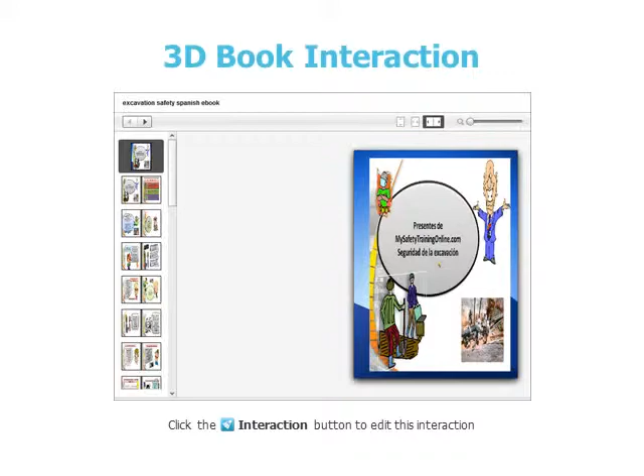What you will learn from excavation safety training: OSHA laws and regulations, excavation injury accident records, excavation safety definitions, the definition of soil classifications, discussion of protective systems, a discussion of sloping and its hazards and controls, and emergency response procedures.

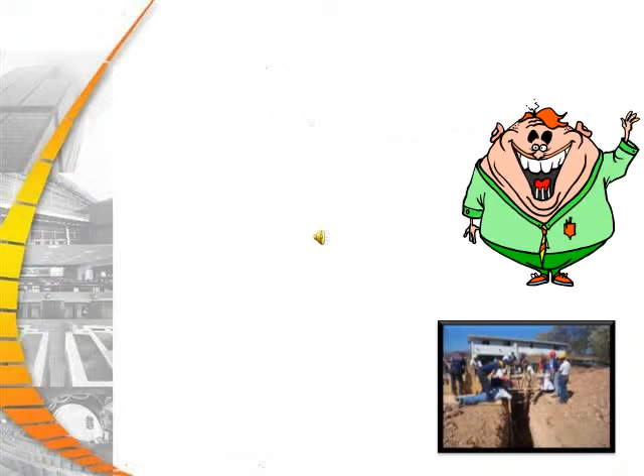29 CFR 1926, Subpart P covers excavation safety. It details that management must appoint a competent person. Soil evaluations must be done by a competent person, along with daily inspections, shoring and sloping evaluations, and most importantly, stop work authority by a competent person.

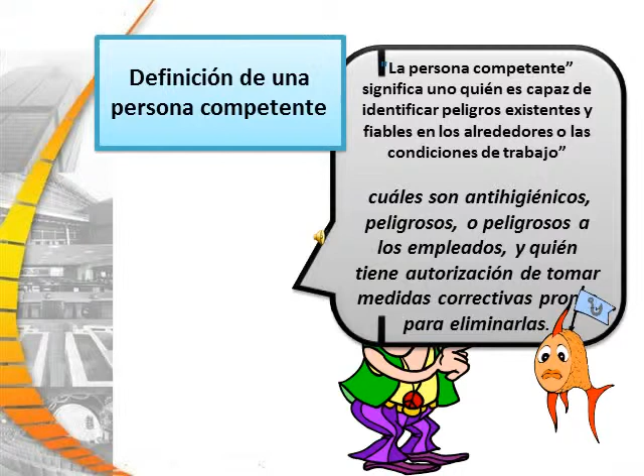Part 2, Excavation Safety Definitions. The definition of a competent person: one who is capable of identifying existing and predictable hazards in the surroundings or working conditions which are unsanitary, hazardous, or dangerous to employees, and who has the authorization to prompt corrective action to eliminate them.

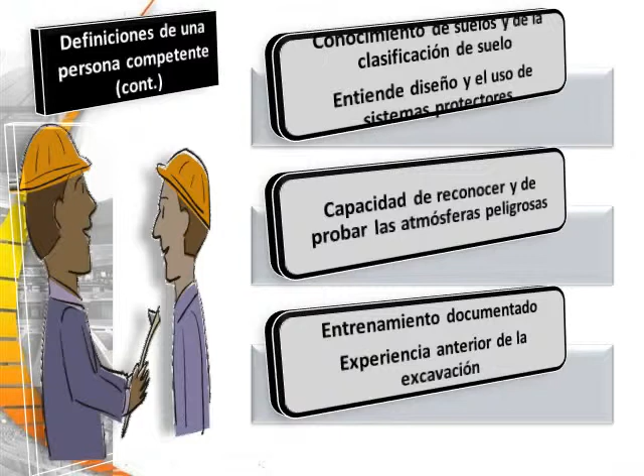Part 3 of a competent person definition. Site safety briefings on excavation safety must be given by the competent person. Daily excavation inspections should be done by the person, and more frequently if conditions change, such as a freeze, a thaw, rain, the introduction of vibration, or the site is physically located in such a situation that it needs more frequent inspections. Most importantly, the competent person must have stop work authority.

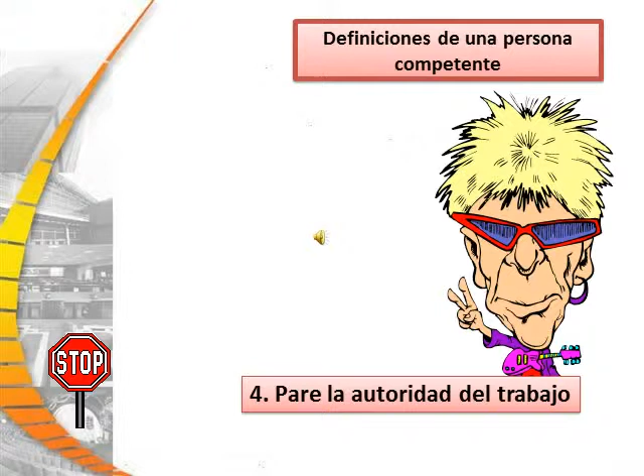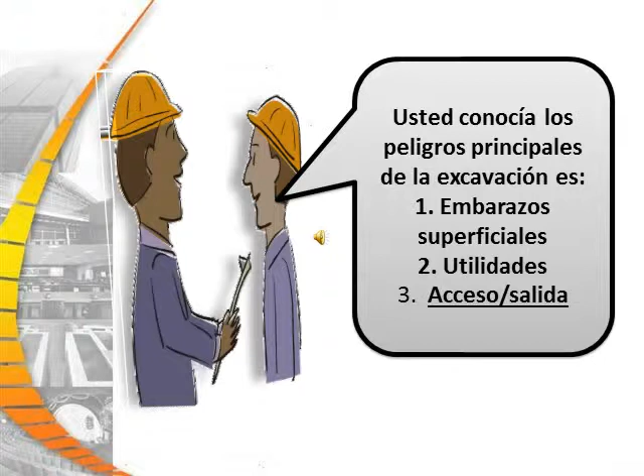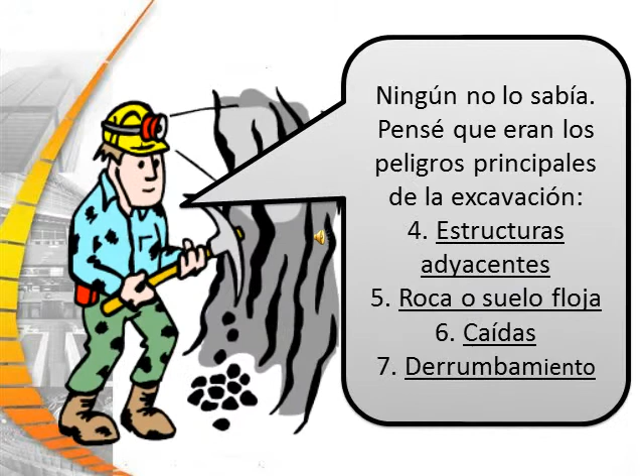Part 3, Excavation Hazards. The main excavation hazards start with surface encumbrances, which we will define, utilities, access and egress issues. These issues also include adjacent structures, loose rock or soil, falls, and cave-ins. Included in these are vehicle traffic, falling loads, mobile equipment, hazardous atmosphere, and water accumulation.

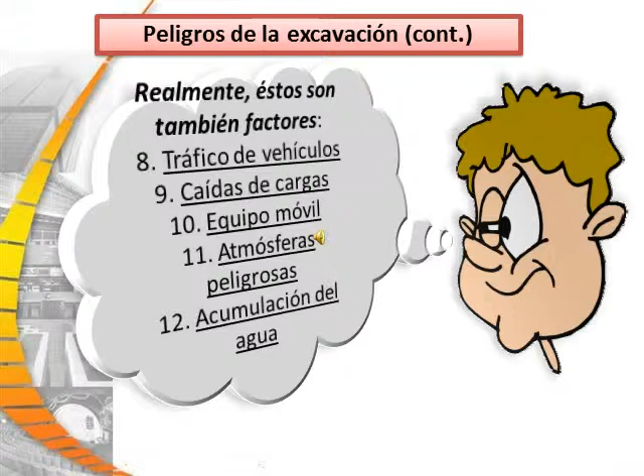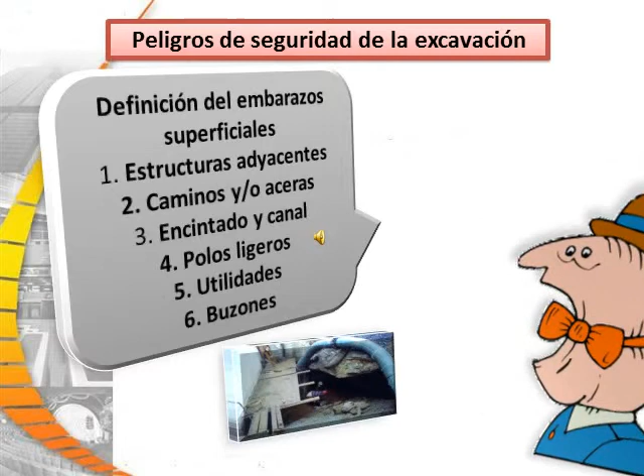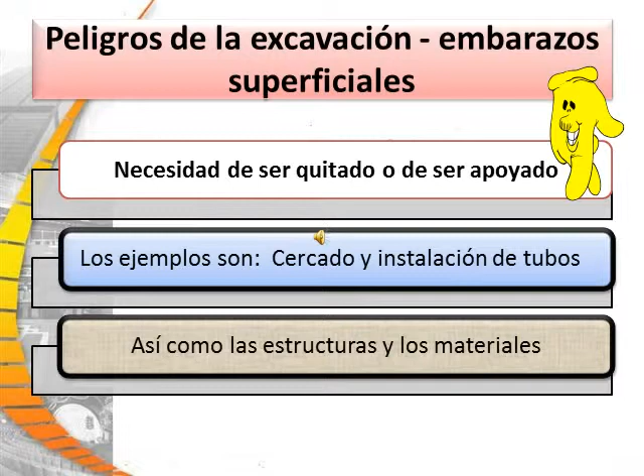Let's define what a surface encumbrance entails. This includes adjacent structures, roads and/or sidewalks, curbs and gutters, light poles, utilities, and mailboxes. Surface encumbrances need to be removed or supported, and examples of this would be fencing and piping, as well as any structures and materials nearby the excavation.

Included excavation hazards are utilities such as electrical, gas, oil, and steam, communication, cable TV, water, and sewer. Remember to locate these prior to digging, certify that they are deactivated, and protect, support, or remove them.

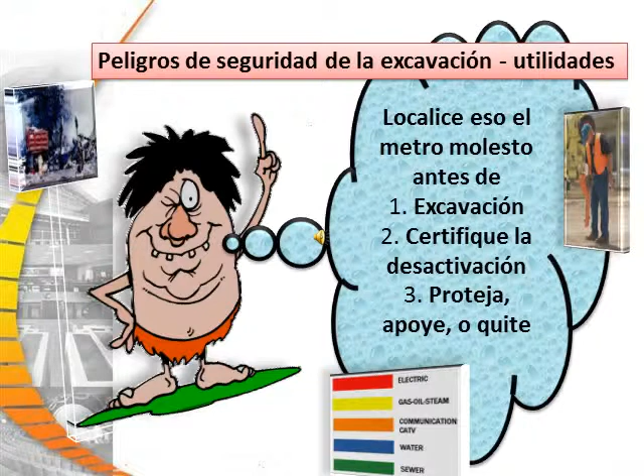The list of excavation safety hazards includes above-ground hazards, such as power lines, which need to be de-energized, relocated, or isolated.

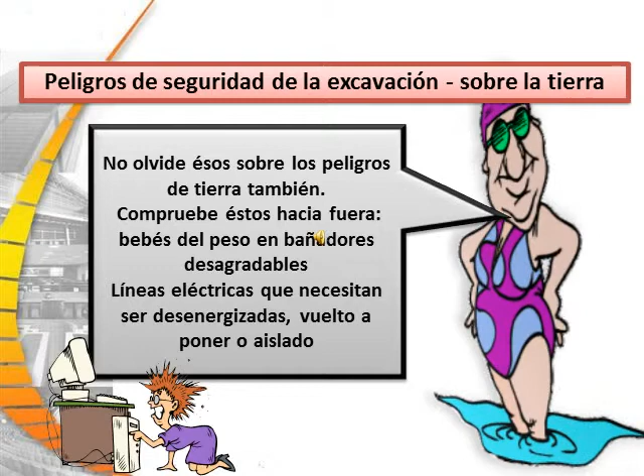Safety hazards include access-egress issues, such as poor housekeeping, which is the number one cause of slips, trips, and falls. Debris needs to be cleared from all work areas. Those hazards need to be marked, such as with barricades or covering the holes, and egress provided for the work crew inside the excavation.

Access and egress criteria mean a 25-foot travel distance from any point in the excavation. The employer is required to provide ladders, ramps, and stairs to allow the work crew to exit the excavation.

Traffic control is done by the competent person who sets up the site, first through evaluation of where the potential hazards are, and then devising methods of controlling those hazards. All personnel exposed to traffic safety issues need to be equipped with traffic safety vests.

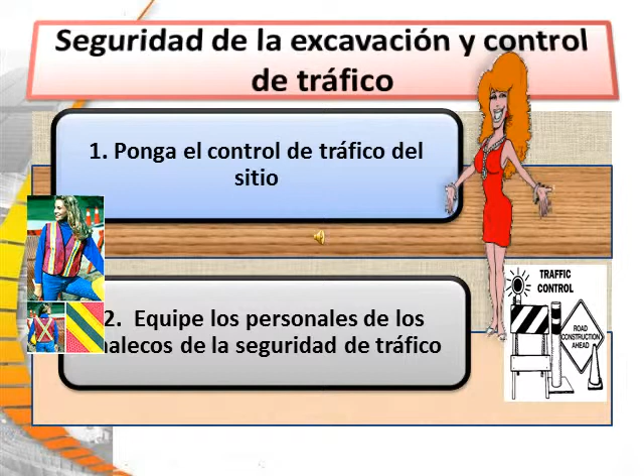Remember, there is no work under loads which are operational, and operators must remain in the cab of all cranes in above-ground work near excavation. A competent person supervising the site will determine when these hazards are controlled.

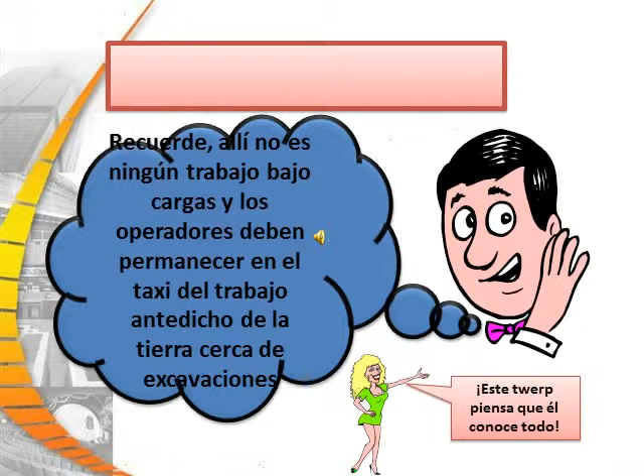Mobile equipment at an excavation site requires setting up a warning system using barricades, hand signals, mechanical signals, and stop logs, as well as grading away from the excavation. All this, of course, is done under the supervision of a competent person.

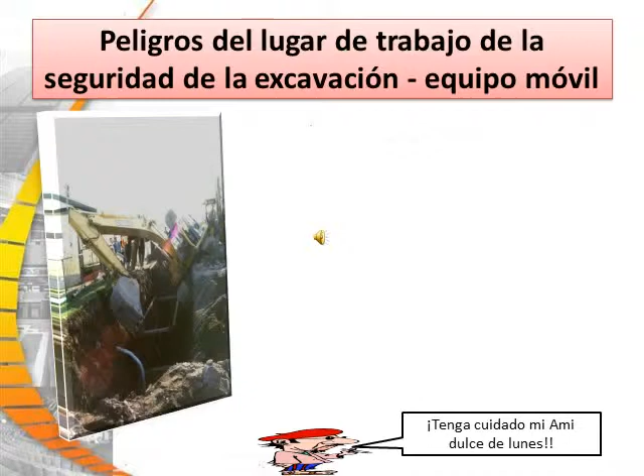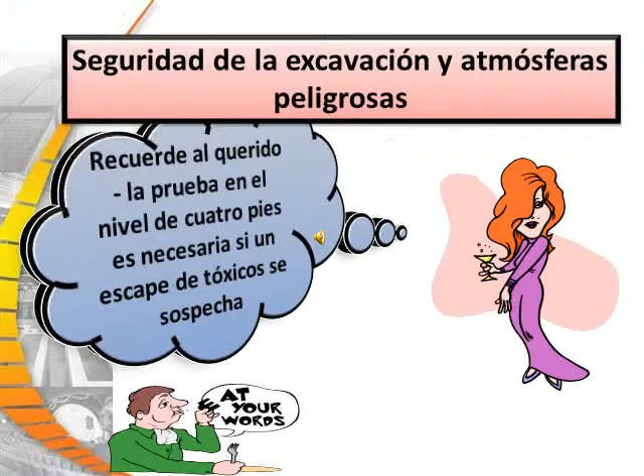Hazardous atmospheres present one of the most prevalent excavation safety hazards, and testing at the 4-foot level is necessary if a leak or toxic substance is suspected by any of the work crew. Testing for hazardous atmospheres includes using the lower explosive limit whenever low oxygen is suspected, and checking for the presence of carbon monoxide, hydrogen sulfide, petroleum products, or other toxics which could invade the atmosphere.

Excavation safety hazards, when controlling hazardous gases, mean displacing those hazardous gases and vapors with considerations for those that are heavier than air or lighter than air. This means exhausting or blowing in a volume of air needed to lower the concentrations to acceptable levels.

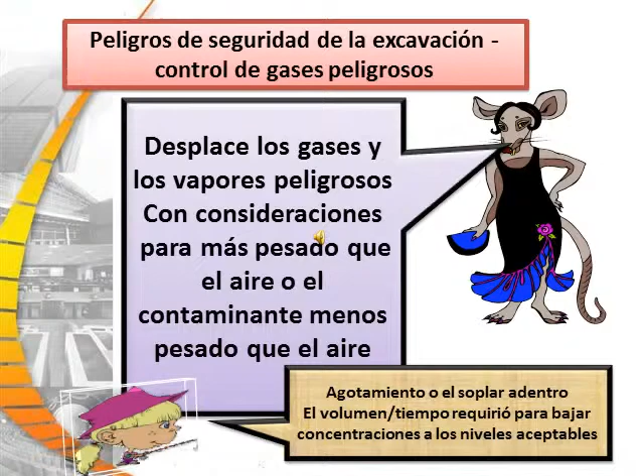Water hazards include protection from water accumulation, water removal using pumping devices, and runoff protection. The competent person should consider temporarily shutting off all water lines anywhere near the excavation site.

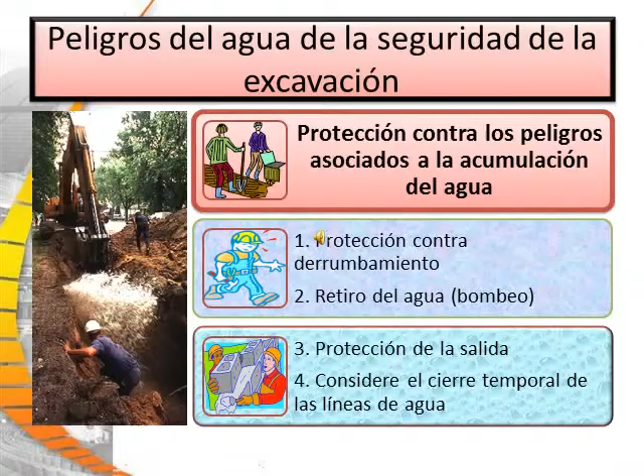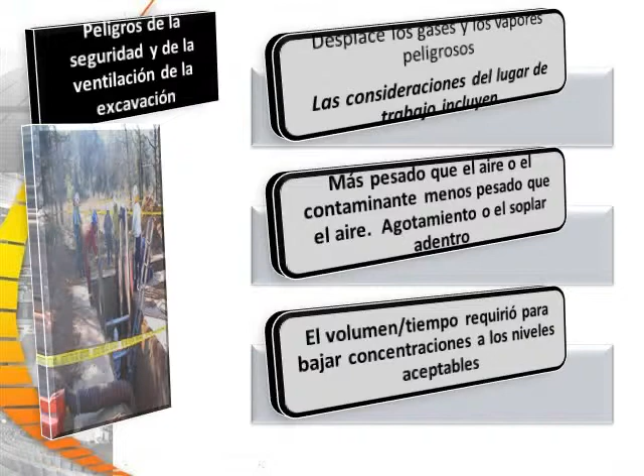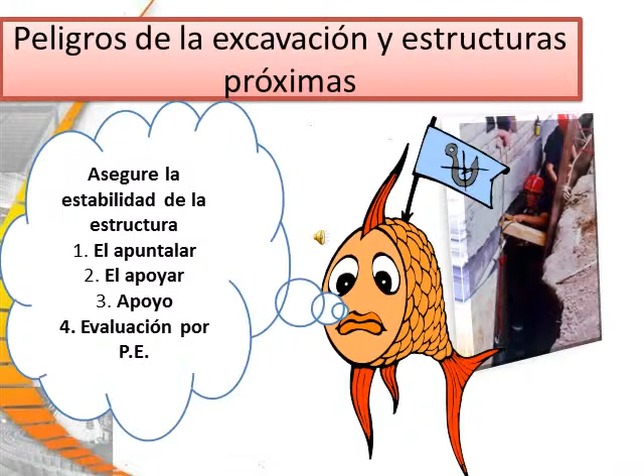Controlling excavation hazards includes shoring and bracing, underpinning, and evaluation by a professional engineer. Rock and soil excavation safety hazards mean the protection of employees from these hazards using scaling, protective barriers, and placing materials at least 2 feet from the edge, with no work on slopes above workers in an excavation.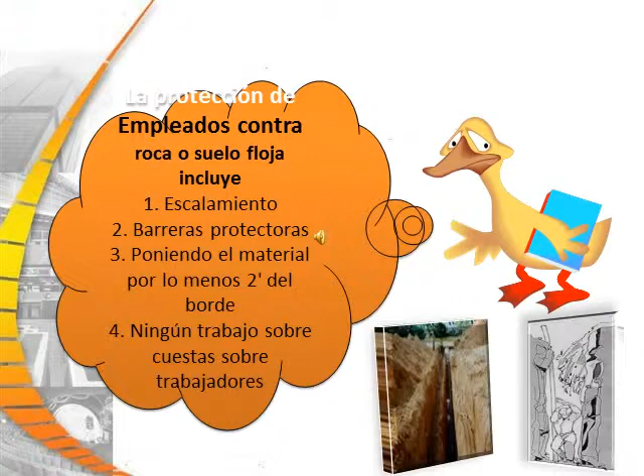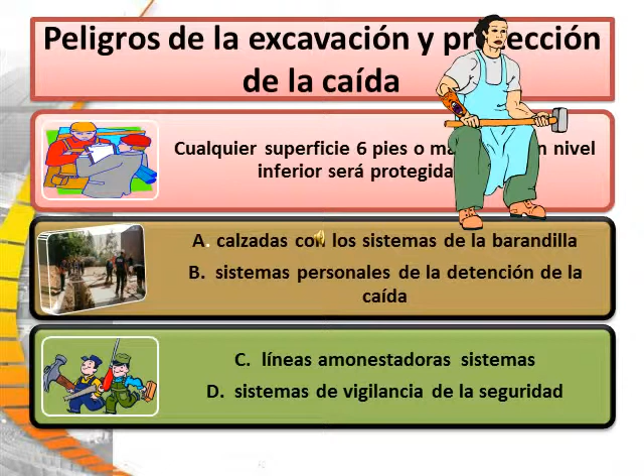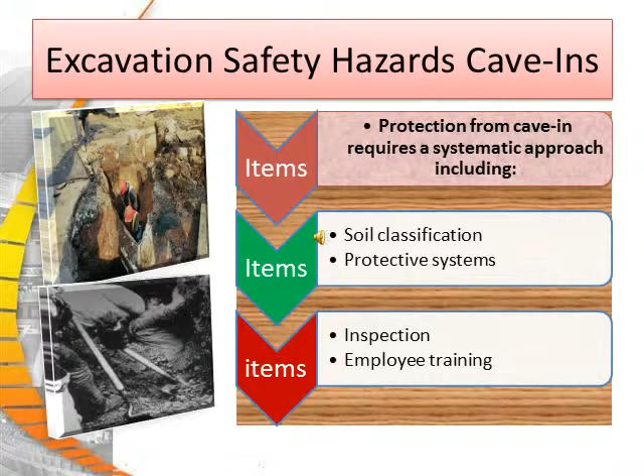Excavation safety hazards for cave-ins include protection from cave-ins requiring a systematic approach using soil classification, protective systems, constant inspections, and employee training. We'll discuss each of these in depth.

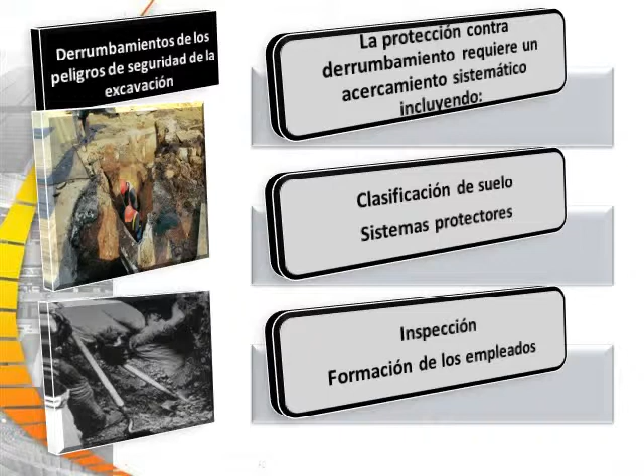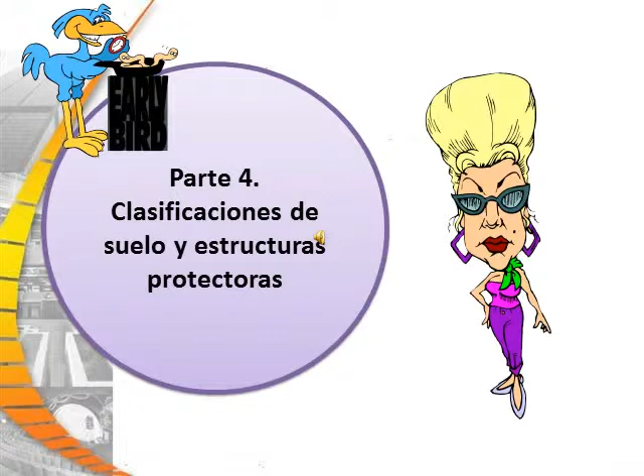Part 4, Soil Classifications and Protective Systems. Protective systems are required unless the excavation is in stable rock, the excavation is less than 5 feet, or 4 feet in some states, and examination by a competent person determines no potential for cave-ins.

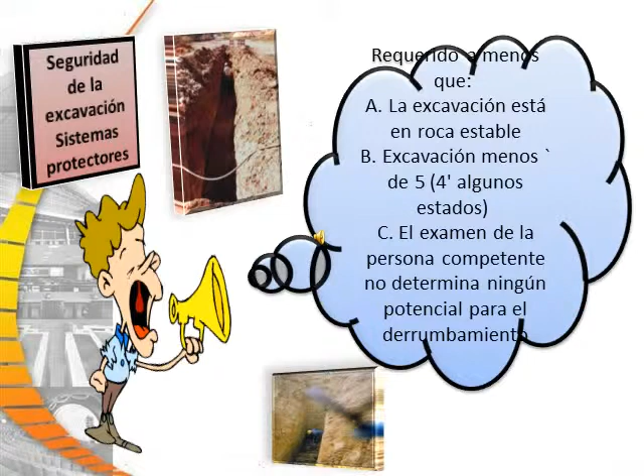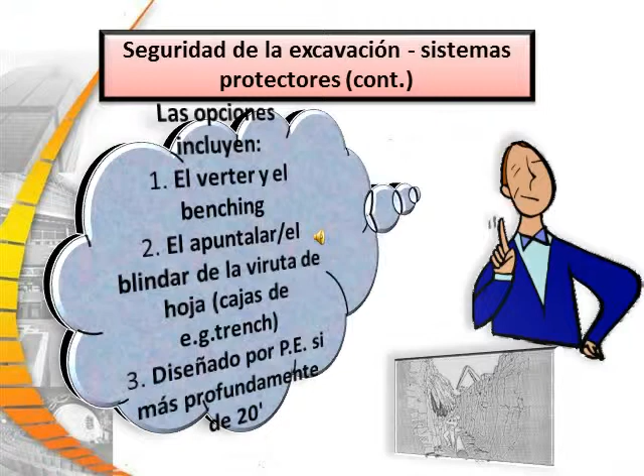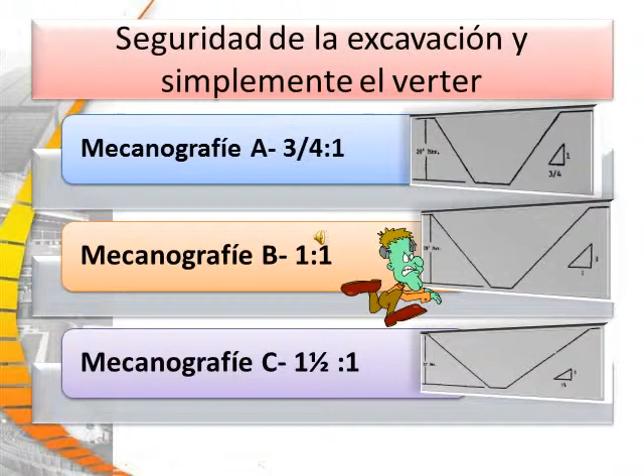The soil types are 3 types. Type A, which is shown in the first diagram. Type B, which is cohesive soil, and type C.

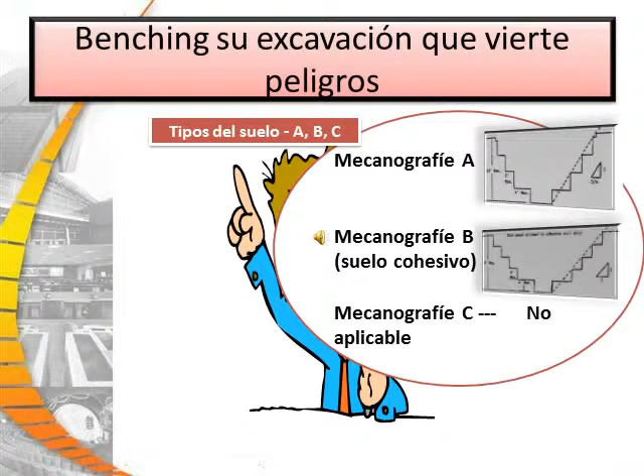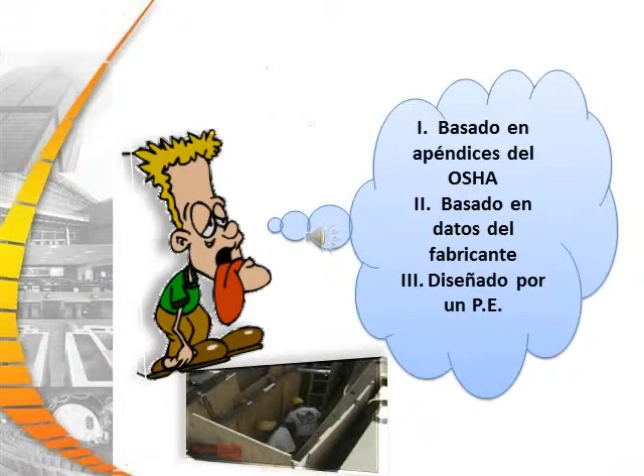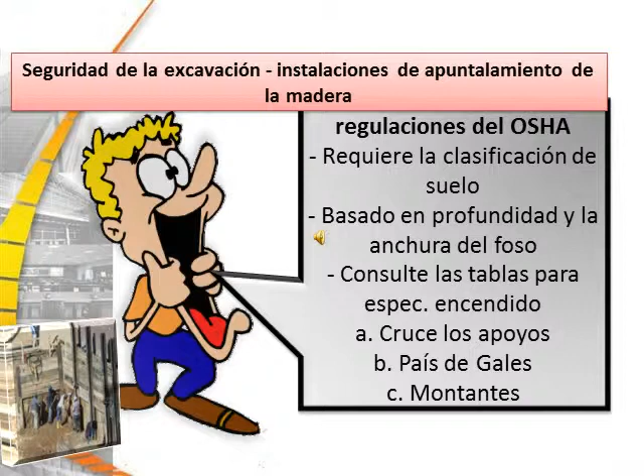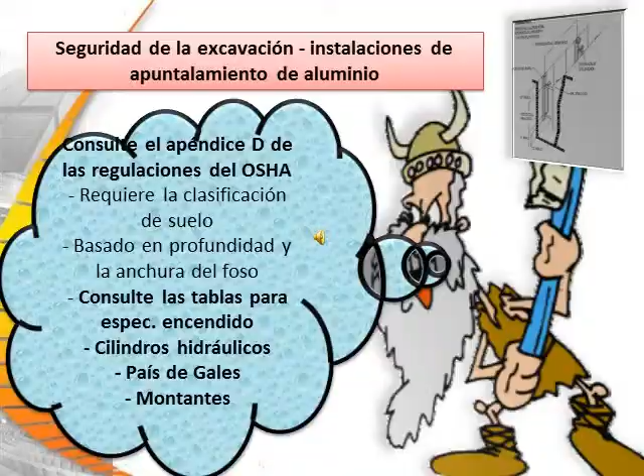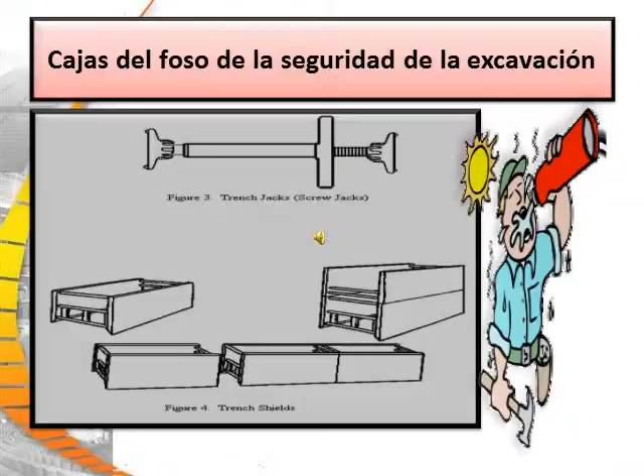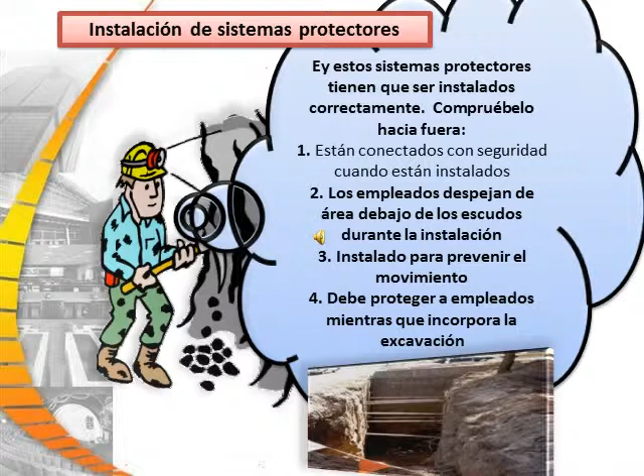Installing protective systems needs to be done in the correct manner. Systems need to be securely connected when they are installed. Employees need to be kept clear of the area under the shields during installation. They need to be installed to prevent movement, and they must protect employees while entering and exiting the excavation.

Protective systems require removal. When they require removal, employees must be kept clear of the area under the shields during removal. The shoring must be removed from the bottom up and slowly, and the backfill will be done after the removal.

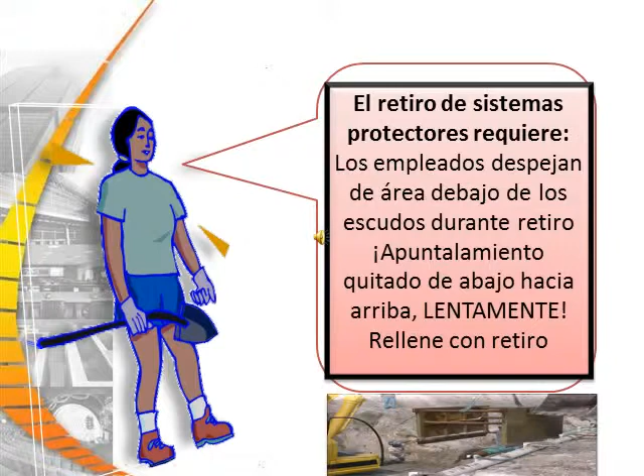Daily inspections by the competent person of excavations are required at the start of the shift if needed, following a rainstorm or other hazard-increasing event, after any possible cave-in that may have happened, a protective system failure, water accumulation, or evidence of hazardous atmospheres. The competent person also has the authority to remove workers from the excavation site.

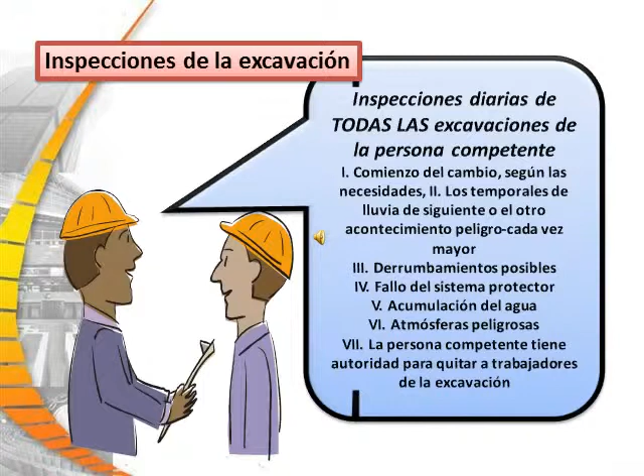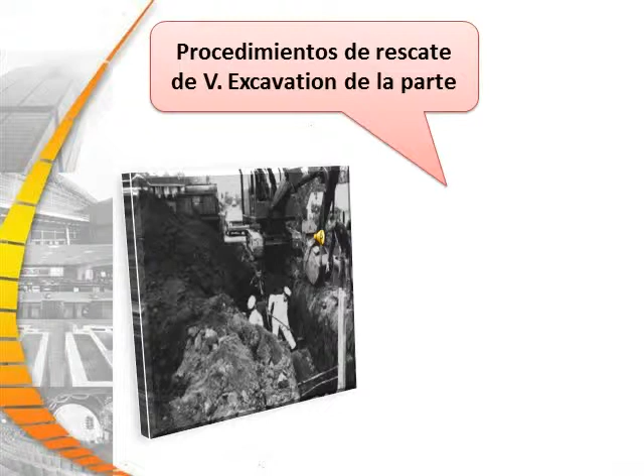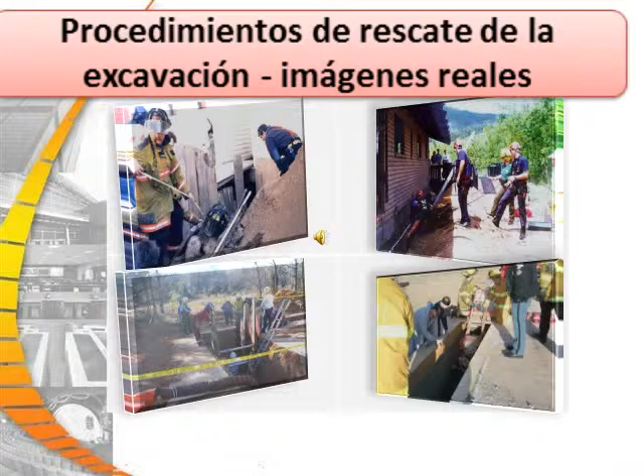Part 5, Excavation Safety Rescue Procedures. Here we can see an excavation safety rescue that actually happened.

You can see the work crews have the ability to easily access the site, the protective systems that are in place, the length and width of the excavation, and specific procedures which have been established.

Remember, do your initial analysis of your situation. What type of incident can happen here? Would it be a cave-in, a flood, a medical situation, a fire, or a spill?

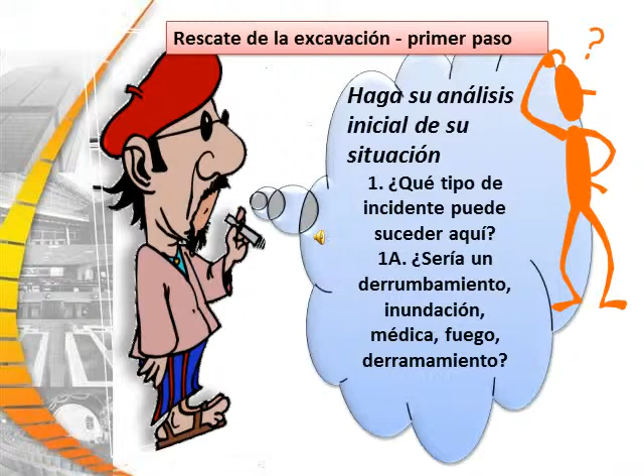What type of injuries can happen here? List the number and type of injuries which would be expected. Who would be the missing personnel? Names, address, phone numbers. What type of chemical or sewage exposure?

What safety measures are needed for excavation, for the rescuers?

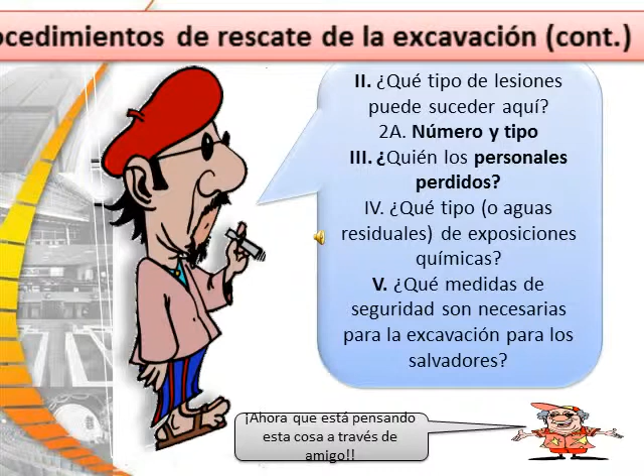Remember to notify field personnel, the health and safety officer, who is often the emergency coordinator. Notify the fire department, the police department, emergency medical services, and the hospital.

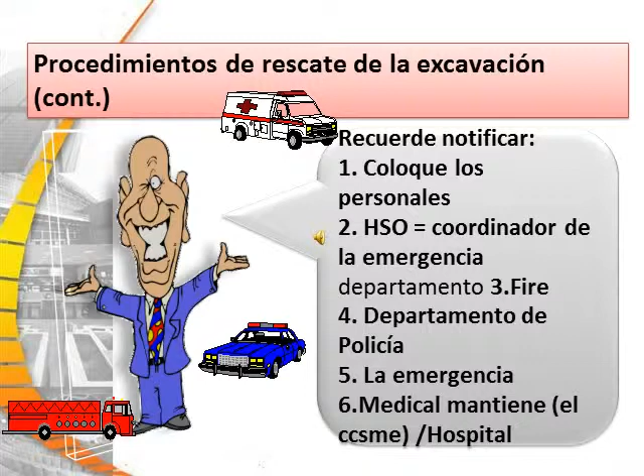Remember, don't be a hockey puck like this guy. First stabilize your cave-in, then control the flooding. Ask if there are any hazardous atmospheres. If yes, first ventilate, then use self-contained breathing apparatus. Provide a safety harness and a line, and a basket stretcher.

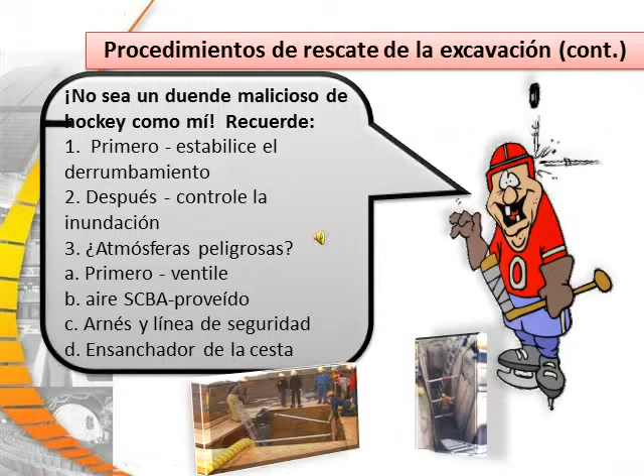The best rescue is one that never happened. Be prepared and practice your rescue frequently.